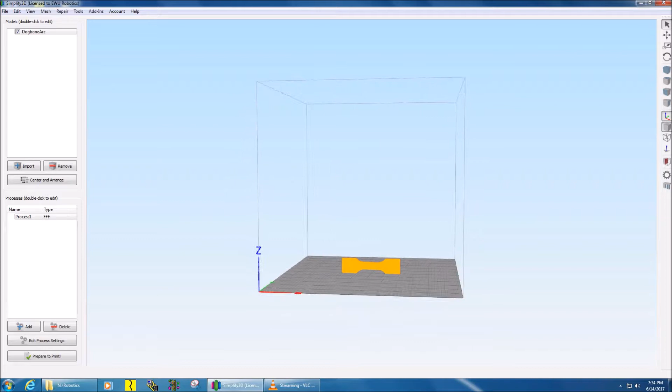In this video, we're going to further look at Simplify3D and go over how to set the options for more advanced tune-ups and things you might want to do to make your component print correctly. So I just imported this dog bone arc, and this is the way I want to print it, but I happen to know that's not going to print nicely this way. And actually, I found out while filming another video that this part needs a raft to print correctly as well.

So we're going to go over how to set this up so it will print nicely. And it's unfortunate, but just because it looks pretty on here, it's not going to necessarily print like it shows here. There's going to be some problems. And printing oftentimes is an iterative process. You're going to have to print and oops, something went wrong, and you have to go back and make some changes.

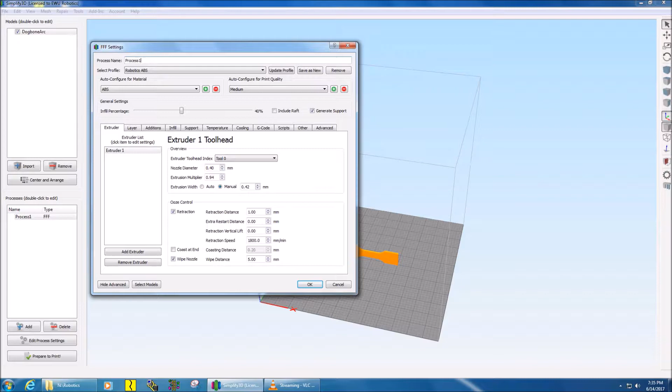So that's what this video is going to deal with. So we're going to go through, this is the edit process settings, and this has anything you want to do basically for the options. And we have profiles here. This is Robotics ABS. This should be what we use. Very rarely will we be using PLA.

And all the basics are up here. So the medium is the default print quality. This has to do with the infill percentage. And actually, I want this to be 100% for this dog bone. But typically, unless you really want a part to be strong or something like that, 20% will do fine. I'll go ahead and show what the differences look like. But this is where you change the infill percentage.

And right here, you can include a raft. And actually, this is about all I need to do, and it'd be done. But what's the fun in that?

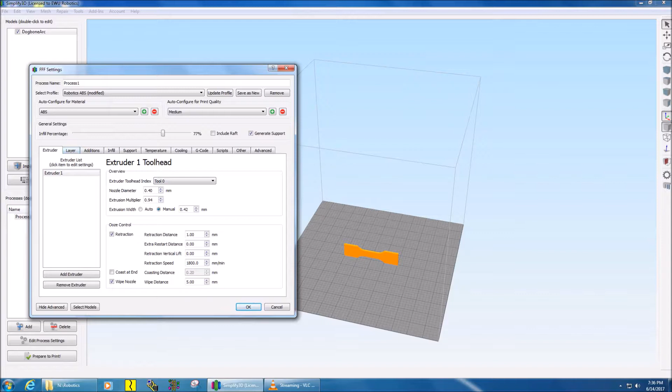So the extruder menu here, you shouldn't really have to play with this. This is all default stuff. When a new filament is ordered and made for the machine, you have to go through here and make sure that the extrusion rate is where you want it. And this takes a few prints to figure out. And all this stuff here, this is for Frank and people who really know how to use a printer to use. So if you need to use this, make sure you're talking to a TA.

Layer, this lets you do some more settings here, like how many top layers do you want. So how many top layers here and bottom layers and shell layers or perimeter shells. And this is all adjustable. You can make them as much as you want. But say you're printing a cube that was solid and you put 0 top solid layers in there, you wouldn't have a solid top layer you could see inside the cube. So it's kind of hard to explain, but it's part of the algorithm and how it decides to fill an object.

And I've never had to play with these, so I don't recommend it. This one, if you want a better resolution with your Z-axis, you can set this a little lower, but I don't recommend that either. I have a printer at home and I've tried this and I've had mixed results with it, so 0.2 millimeters is about where it should be.

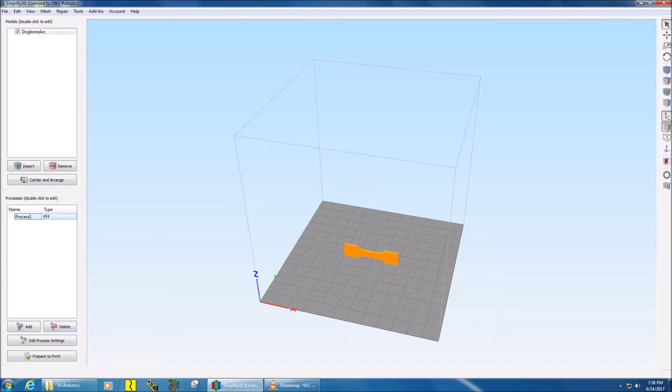Now additions, this is where you can go and help your print out a bit. So raft is here, and actually you can set more options for your raft. So in the case of this part here, I actually want, just to make sure that it works, I want to make that 5 millimeters offset. Back to additions, there we go.

And you can choose how many layers it is, separation distance, infill. So this stuff you might just have to play around with, but these defaults are pretty good for most things. We typically always use a brim.

The brim, when it prints, will print an outline around the part, and it helps the printer print some filament out before it actually starts on your print. So that will help you to see how it's extruding, and also usually the first extrusion it makes isn't that good, and the brim isn't that important. I mean, it's important for little things like keeping the heat around your part and things like that, and there's a whole list of things it will do for you too.

But basically, the way I see it, it's just an outline. It prints and it gets it started, and then once it's primed, it will actually start printing your part, and then the brim is just a single layer, so it doesn't really have an impact on your part except for helping the extruder prime itself.

Now this one is a little more interesting. You got your infill patterns, and this is basically the algorithm it will use to fill. And I don't really think there's particularly any real advantage to these. Rectilinear is the basic one. Honeycomb, I think it takes a little longer to print. And you can change these settings too. These are pretty advanced. Usually there's no problems with these.

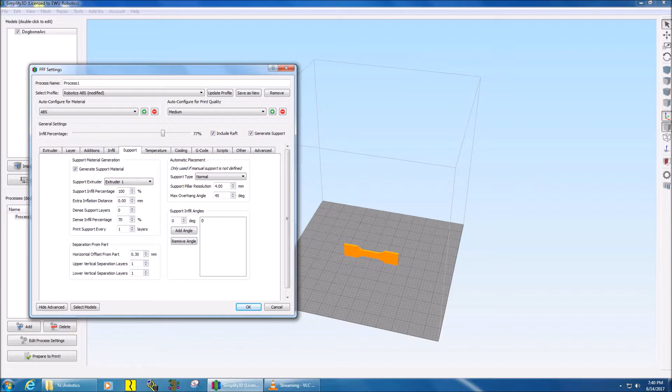The one you'll want to change more often, I believe, would be support. So support material is what I'm going to actually have to use for this part here. And a lot of the time, it will calculate it automatically and put in the support material where it should be. So let me go ahead and show this.

When you hit prepare to print, it's going to show you how it's going to print the part. And if you look up here, it's going to show you the little colors up here. It will show you which one's which. So you got your support material, which is gray, and as you can see, there's no support material here. It should have generated some, but it didn't, so I'm going to have to put in some manual support material. So I'm going to go ahead and do that really quick.

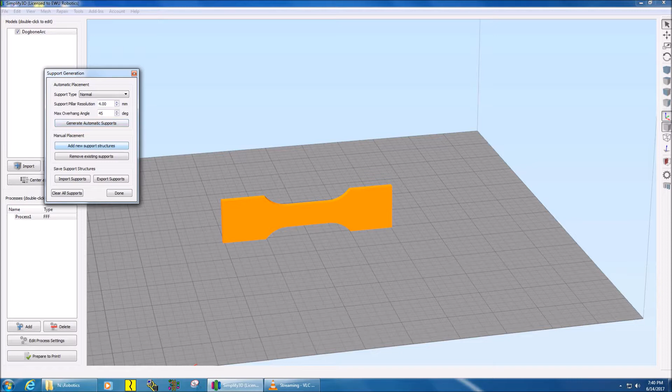This button on the bottom right is manual supports. Basically, you can have it generate them, but it won't do it in this case. So I'm going to add a new support structure, and I just go ahead until you can see it cut off right there, and place that one. You kind of have to get a feel for it, but this should be enough.

And then you can actually change the settings for that support material in this menu here. So what percentage infill it is, and this becomes important because the support material, depending on how big your component is, if it's too thick and it's too intrusive, it'll actually damage your part while you try and take it off the part. So sometimes you want to lower that percentage. I've gone down as low as 25% sometimes, and this one too.

And that's about as much as there is to say about that. Unless you know a lot more about printing than I do, you may want to do some more changes with that. But generally, the default settings are good enough.

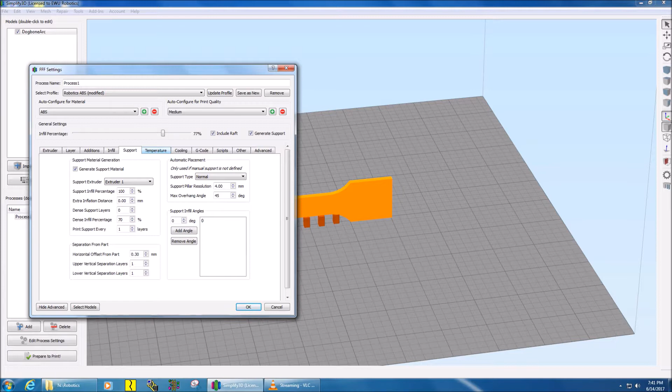Temperatures. This is very crucial, especially for ABS. You want to make sure the temperatures are right, and generally once you're set for the reel of filament, you don't have to change them. So the heated bed is at 80 degrees Celsius. That lets it stick and not warp while it's being printed, because ABS is very temperature sensitive, so it will warp easily. And then to extrude, it needs to be about 230 to 240 Celsius, and these are pretty set in stone. Let Frank deal with these.

Unless you are a TA who wants to deal with these yourself, then you should still contact Frank about it, because this is like the bread and butter of how the printer prints with its filament. Cooling isn't necessary. It's only necessary for PLA, which we rarely print. G code I haven't ever had to change. Try not to mess with this because it will probably ruin the printer in some way.

Then the printing speed is here if you want to print faster. I don't recommend that either. If you're really confident with your own printer and you want to use the same program and make it print faster, I've done this myself, and it is pretty nice because prints can take a long time, and sometimes if it's a simple part, you can afford to up the print speed.

And this is more for when you buy a new reel of filament. They actually want you to measure the filament. This is a 3mm filament, but it's actually 2.96, so this also goes into the algorithm for how much it's extruding. And then this is just for how much it costs per kilogram, pretty self-explanatory really. I don't mess with this usually. And this is also stuff you shouldn't really have to mess with. So basically the main things you want to mess with are the infill, additions, and that's really about it.